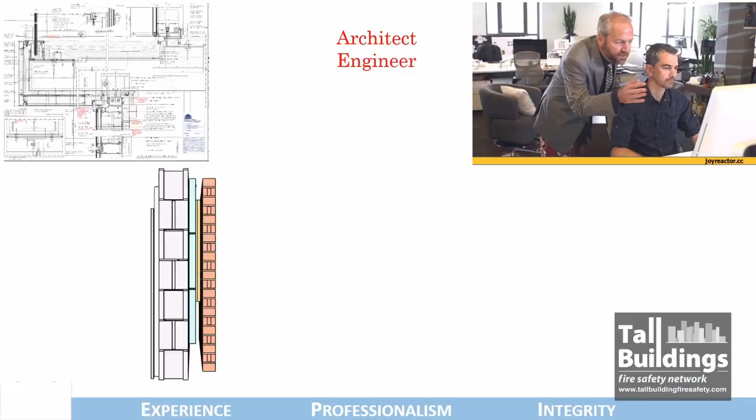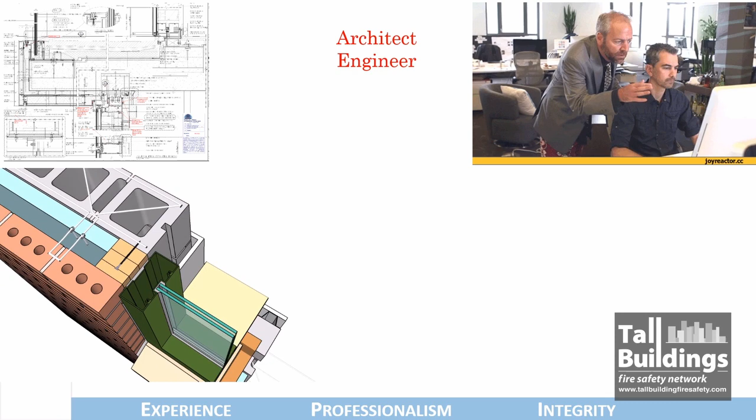So I'm going to start with a simple but important point. I think the audience can guess which of the two individuals is an architect and which is an engineer. A lot happens on the drawing board, a lot happens with the architect and engineer doing tug of war before the contractor gets the order. The contractor says, well, I'm already behind 5 months because you two were fighting about what looks good. This is the unfortunate reality - at the construction site, the situation is often very different, and it is here that intervention is very critical.

People need to understand that what was designed and what is coming on site is probably very different. So I'm going to touch upon the fire tests and mechanisms for facade fire safety, but drive towards a very important point about compliance and how compliance mechanisms exist.

They are very evolved across various products, and now several countries have started adopting them in a clear, impartial way. These are available and accessible for governments, authorities having jurisdiction, or entities who would say, this is what we need in our specifications. I'm going to try and make it simple.

Materials burn - the Professor was talking about it, we all know, we all have been seeing. There are people with innovative ways to evaluate, maybe with a blowtorch saying, oh this is going to burn. But how do we really make it very easy?

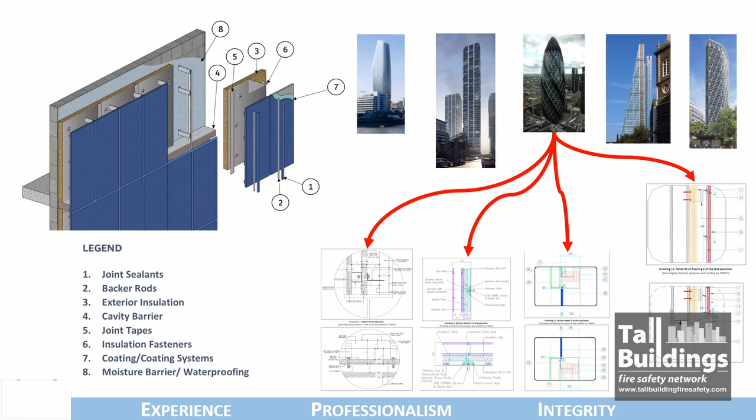If any of you have these 4 things figured out - understanding these 4 properties of any building material going into the cladding - well, half the battle is won, because now you are equipped to understand that when designing a cladding system, which unfortunately could have hundreds of drawings, which of those drawings, which of those adjacencies can have a buildup of materials with high combustibility or high calorific value adjacent to a low ignition temperature.

And it's very basic logic. Imagine what is potentially the most risky buildup of materials, and from there evaluate calorific value versus ignitability. What is the adjacency? This is pure simple. All of this, unfortunately, is...

explained via very complicated nomenclature. I'm happy to say we have registered a CPD with RIBA to talk in great detail about how to link ignitability and all of these in a simple way, to ensure fire safety in facades is not as complicated as we have probably been making it.

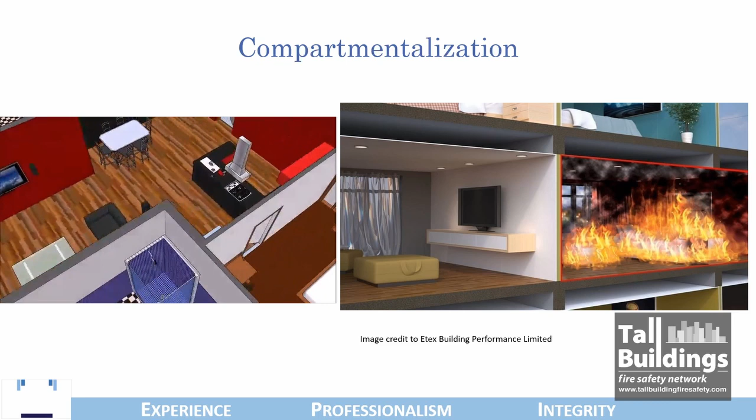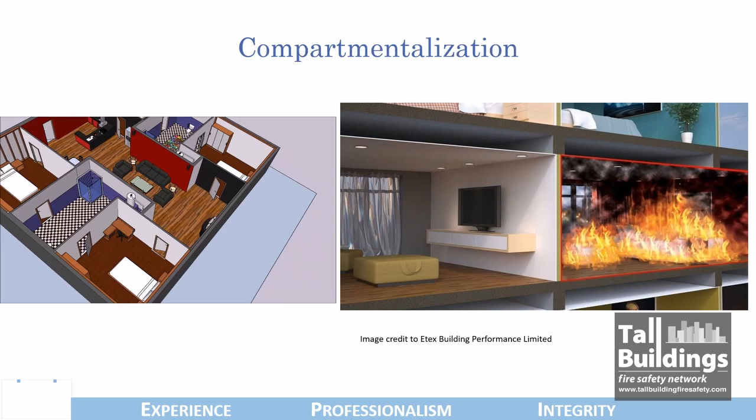Any building envelope needs to also ensure compartmentalization, because the building envelope often ends up being the wall of the building exterior. In some parts, we need to make sure that it is able to contain the fire within the floor and doesn't go on the floor above.

And there is a myriad of standards, so many different test methods to evaluate so many different components and systems. Here is a look at the European norm, or the EN standard, which talks about fire resistance of not just facades as a whole, but also something that can be used to evaluate components.

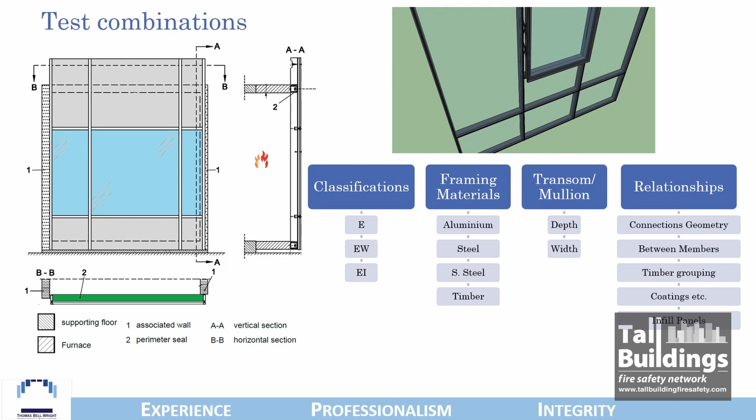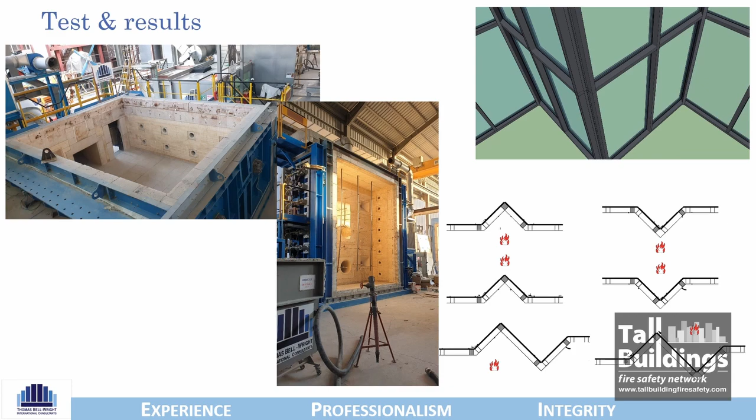For people familiar with facades, people familiar with curtain wall systems would know and understand that a fire test is often a standalone event. Someone tested one system, one product, but on site and in reality, if you look at the product catalogs of various suppliers, it's a very long list of combinations that need to be evaluated, tested, and can become very, very complicated sometimes.

If you look at the image on the bottom right, you can realize that just because of the topology and where all a fire can come to be, there are so many scenarios that exist. And hence, it is very, very demanding on anybody who is trying to evaluate the fire safety or the potential fire hazard in the design of the building envelope.

But the good news is that a lot of this is already done. There are a very, very large number of material suppliers as well as other commercial entities who have done all of these tests. They know how products behave, and a lot of intelligence actually exists. And it could be coming from different forms.

You could have an American test method evaluating the same thing. And I'm very keen and eager to see the result of the research that Professor talked about, comparing different test methods. And I could spend a day talking to all of you about how these different test methods operate, because we are lucky to be in Dubai.

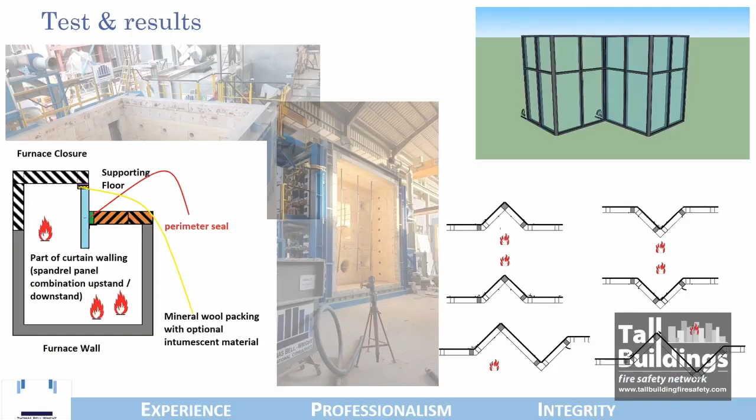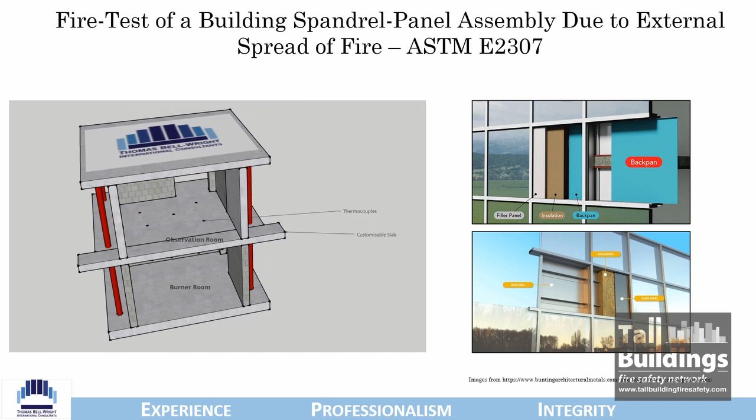This is the intermediate scale multi-story test apparatus, or ISMA, which is a test setup that can be used to evaluate fire resistance for perimeter fire barriers, spandrels, one of the tests that Srinivas was mentioning about, but also the NFPA 285 test, which is the brother or cousin brother of the BS 8414.

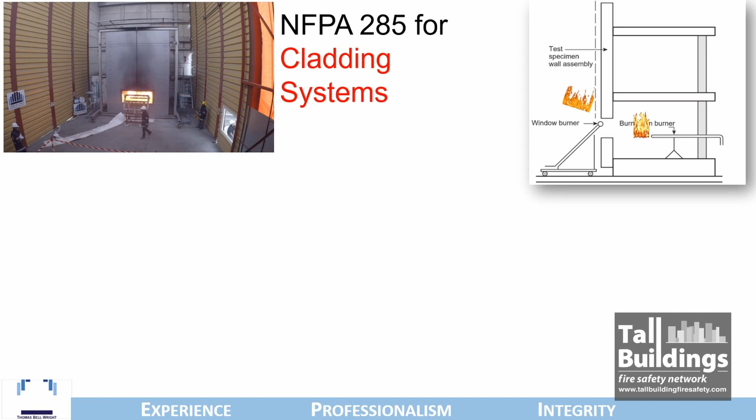But as I was trying to explain, different test methods, American, British, the result is the same. We are trying to evaluate the product's behavior. Whether it's the NFPA 285 test for fire propagation, or the BS 8414 test, again, for fire propagation. And it is an endless debate about how one test could be better than the other or not.

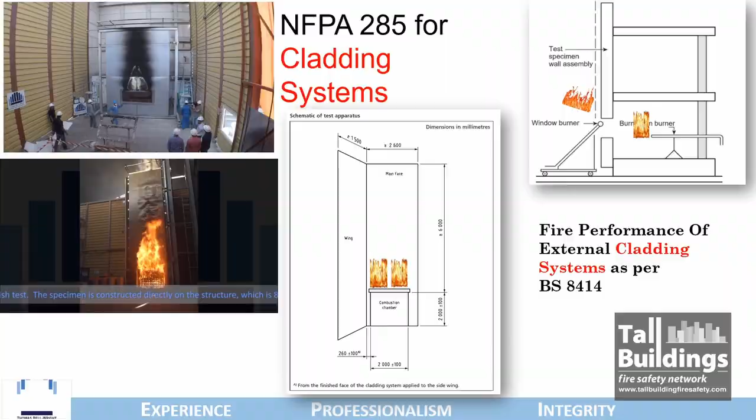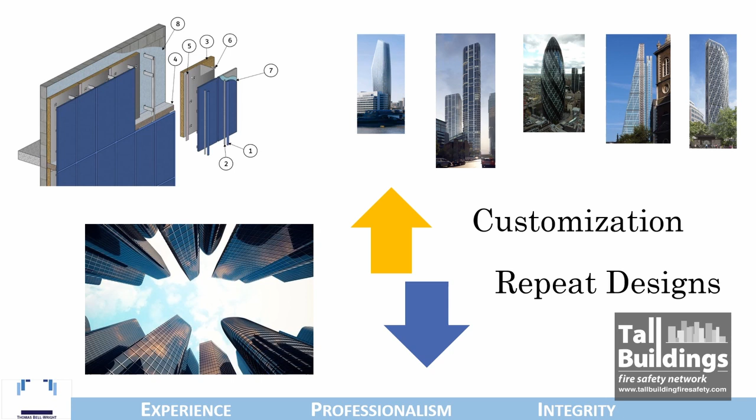But it is critical to understand two aspects: what is the result, and why are we doing the test? When we are doing material tests, we want to assess how the material behaves. And when we are assessing 100 different drawings of a cladding system, we want to make sure that the system design is correct, that the choice of materials and the choice of adjacencies is correct.

And of course, there is a big debate about the architect's dreams and engineer's nightmare, as Professor mentioned, that there has to be a balance. If there is a need to innovate, if there is a need to differentiate the building exterior, then money needs to be spent to evaluate that it is different. Thank you, everyone.

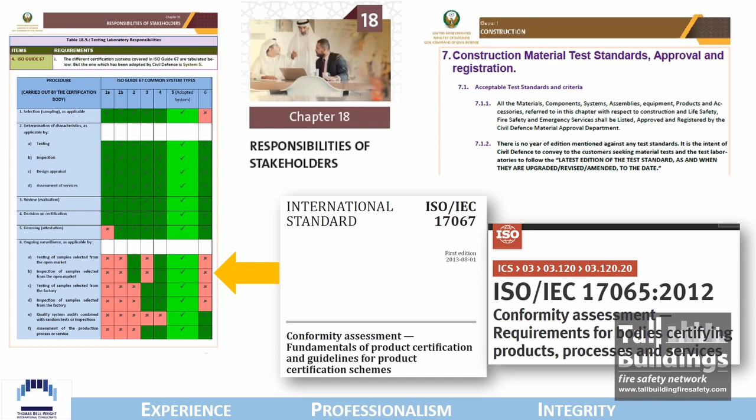But not just that. The independent third-party body needs to be accredited and evaluated as per not just 17065, but they even go down to defining which certification mechanism, as per Guide 67, which is Type 5, that it needs to do sampling before the test is done. What is the frequency when the factory needs to be audited?

And only then, when there is an established independent third-party certification body taking ownership of what material will come on the site, is when the mechanism of registration needs to be done—who is the commercial entity who will supply the product. So there is complete traceability of who all are the stakeholders involved in assurance of repeatability at the manufacturing location, and who are the stakeholders delivering the product and taking on the responsibility.

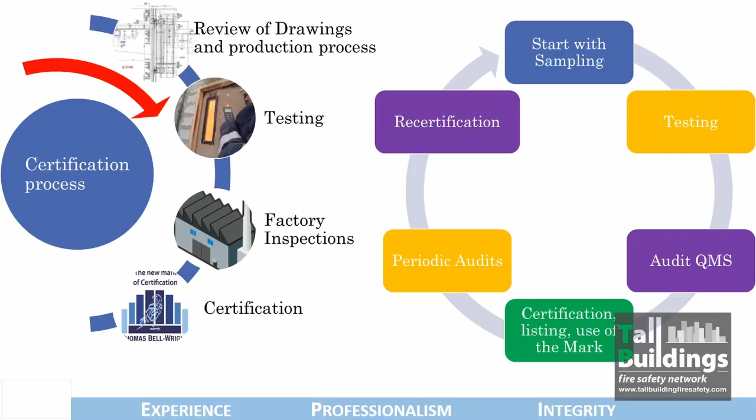And I really would like to talk about certification and listing as a mechanism which is not only adopted in the United States and so many other countries, but for so many products, is just a simple 4 or 5 step process.

Before the test is conducted, there has to be someone who visits the manufacturing location and witnesses how the product is manufactured, and creates a traceability of the sample, the test report, which becomes the basis of assurance. And not just that, it will also create a very high level of traceability, which means the product needs to carry a certification mark, a traceability number that can be tracked at the construction site.

There is labeling on the product. If you look at your mobile phones, chargers, you will see up to 6 or 7 traceability numbers. You can look up, for example, this projector here.

It will have a traceability number, let's say under the CE mark, there'll be a 4-digit number. If you look up that number, it will tell you whether it was TUV or SGS or Intertek or whoever did the test of that product, in which laboratory, etc. And all of these traceability-led certification mechanisms are currently already available.

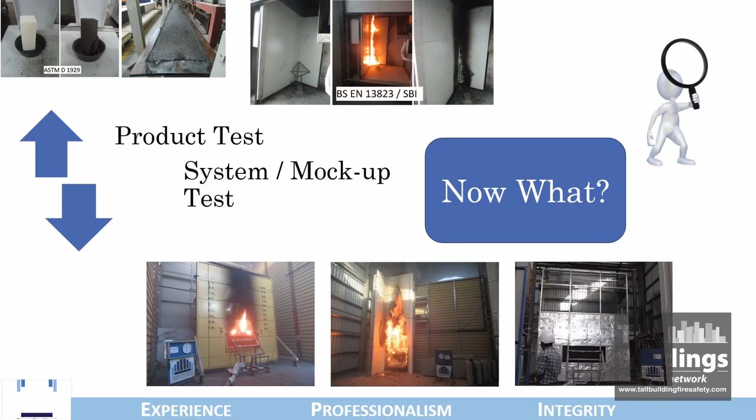But then what? What is the next step? You have this assurance, great. What is happening on the construction site? Who is evaluating that at the construction site we are not in a situation which is potentially risky? And I want to tell you that this mechanism already exists.

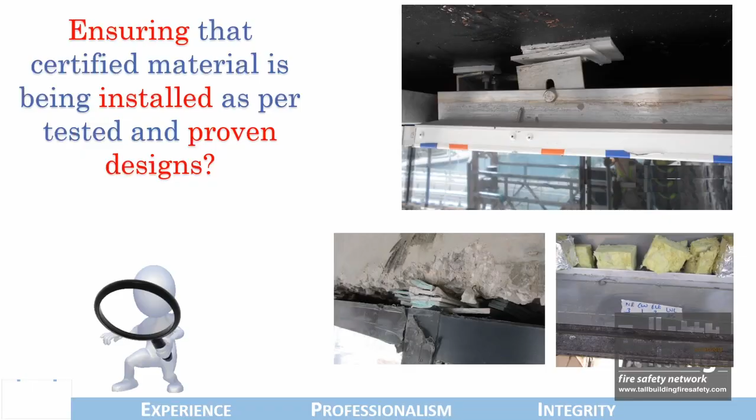There are codes which mandate this compliance, and I want to very quickly show you a video - this is an aluminum composite panel headed for the construction site, at the construction site. You look at the back, you see the traceability number. The traceability number can be looked up on the certification directory. When you click open the certification directory, you can see what is the traceability of the product.

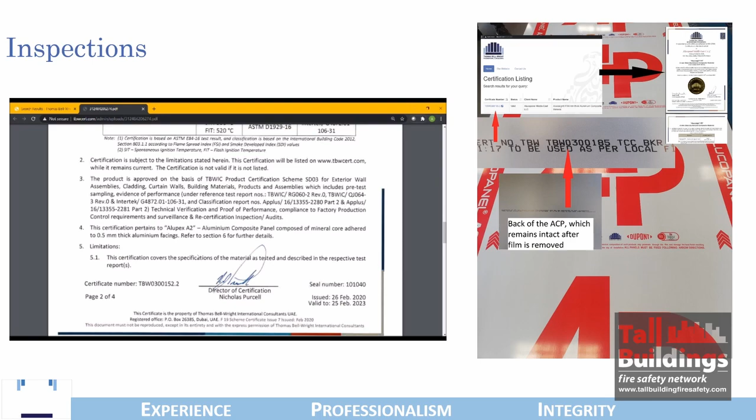What was it tested to? What test methods? What configuration? All of that data is actually available right now, and we just need to connect the dots and make sure the whole process is in place.

So I'll quickly summarize. This is a 3-point mechanism which also forms the basis of the UAE Fire and Life Safety Code. The first step could be entrusted as a responsibility to either the fire consultant or the facade specialist or the contractor - this is completely up to the mechanism you want, contractual or legal. Make sure that these people are taking responsibility of specifying or getting the right material in place.

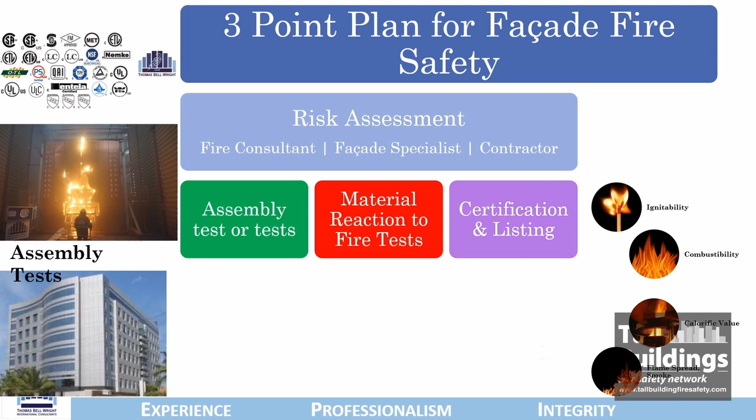Whether it's tested, certified, listed - the subcontractor or contractor takes up the assurance of having a large-scale fire test done, to say out of the 500 risky scenarios, the 3 risky scenarios were tested and evaluated, and have someone close the loop. Inspect the system, make sure the inspection is done, and have maybe a legally binding, contractually, commercially, whatever linkage the contract needs to have.

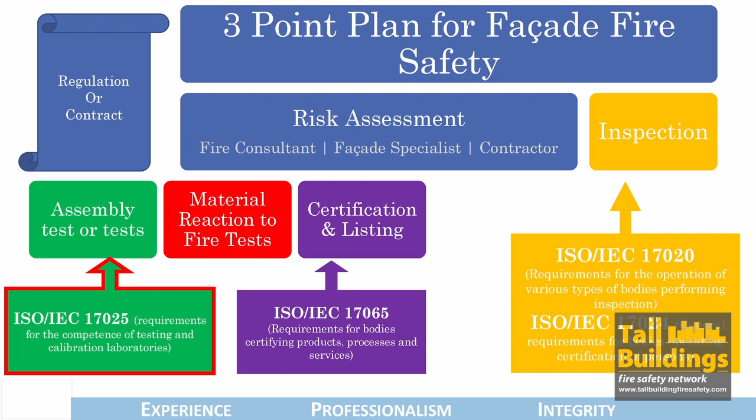But there needs to be a motivation to make sure these steps are followed. And it's very clear - there are internationally published guidelines. The standards exist so that we do not need to say only this commercial entity or that commercial entity is allowed to do these tests. The ISO standards are adopted across jurisdictions, by countries, by governments, to make it a level playing field everywhere.

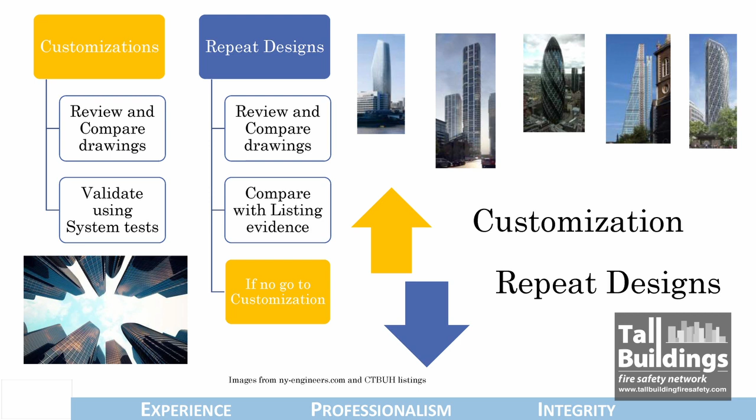And just as a concluding slide, I must add this, because this is quite a debate - why are we asked to do the tests again and again? Why should we do another test? Why should we spend so much money? Well, if you don't want to spend the money, build the same thing that you built last time and prove it. It's very simple. If you need to innovate, if you want to differentiate and say my building should look a class apart, then you have to spend the money.

If you are getting a customized car built, which some people do, and there are some automotive suppliers who build a car as per you, then you pay as per it, or you buy something which is assembly line. So that's it, that's the last slide. Questions and answers are happening later. I hope I've saved up some time, or as Russ says, maybe 1 or 2 minutes. Thank you very much.

Thank you, everyone.